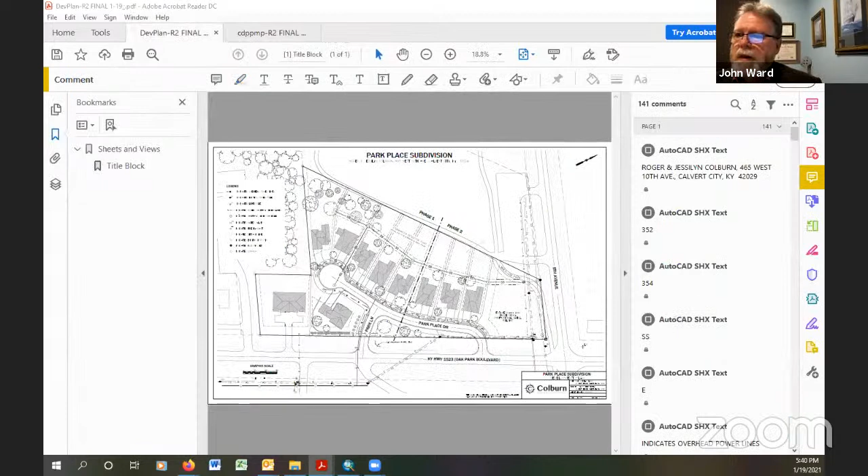Okay, the first item, HDR did the review. In the first one it was, hey John, before you go through, look and see, make sure that the title block shows Roger and Jessilyn as the owners. Time out.

There you go. What's it say down there? Developer, Colburn Development LLC. So Roger and Jessilyn, that's the developer. No, I'm sorry, it says the owner is Roger and Jessilyn Colburn. You're good. Okay, that's all. Yeah, that's all I needed to know. Okay, all right, good.

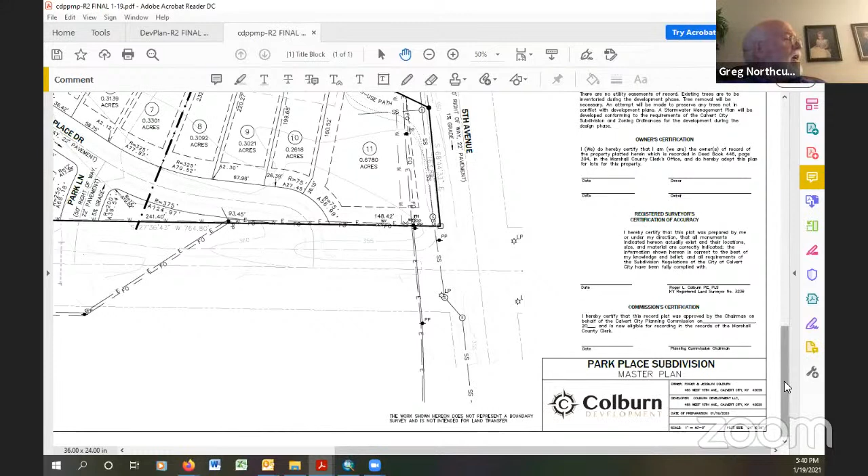Now you can go back and we can look at the letter. Okay, we'll go through that, I'll try to speed this up. Roger, if you need to interject, feel free to.

Do I need to swear him in? Yeah, public hearing anymore. All right. Oh yeah, that's right, it's not a hearing. No, you're right. Just listen to Darren, he knows what he's doing.

All right, item 1: section 44F4B of the subdivision regulation, streets, in regards to right of way. There is no mention of the city of Calvert City bikeway that is located on the master plan within proposed lot 11. Information needs to be provided that clarifies how this master plan will impact the bikeway. Has research been conducted to determine if the deed of declaration or easements exist for the section of the bikeway? Results of the research need to be added to the master plan for verification.

Roger, would you go ahead and address that? I know there was supposed to be one sent by. Yeah.

So up on the master plan, we have updated it to reflect that comment. The trail is now labeled and the limits of the easement are shown. And in the legend, we included an item for the easement on the multi-use path, so you could see the line string there and know what it was. The easement is roughly 20 feet off of the center line of the path, and so we transcribed it onto our plat based on the information BFW gave us.

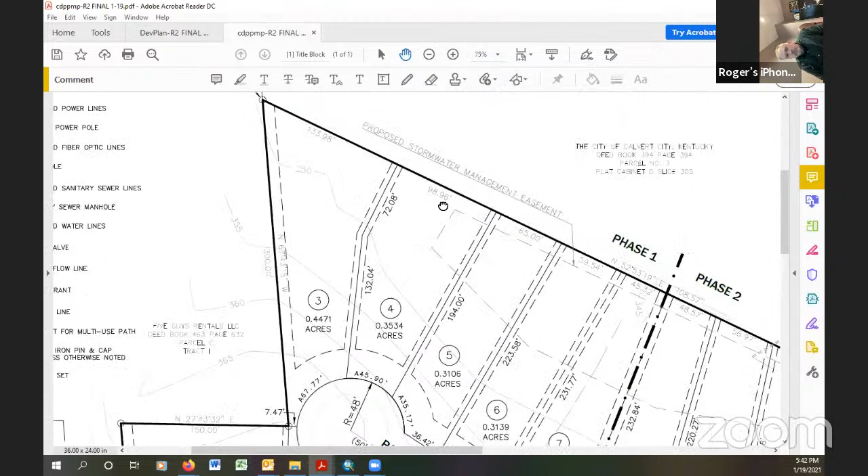That would be this dotted line here, and it's 20 feet either side of that. The dotted line is the limit. Everything to the west and north of the dotted line would be in the easement. Between the property line and the dotted line is in the easement. This whole area.

They gave us a figure that had our property line on it, and Isaac overlaid that on there, and it's pretty good for master plan purposes. And of course, we got the easement document stuff. We'll make sure it's all formalized, and so that item should be addressed. All right, so that was number 1. Anybody have any questions about that?

Item 2: proposed lots 3 through 11 appear to encroach upon an existing gravel access road. Now, that is not the case. In this case, the actual gravel road is the city's, and it encroaches on his property. So that's not something he has to deal with. We will actually be making a change to that ourselves. Therefore, item 2 is not relevant to this particular master plan as far as Roger goes.

Item 3, also part of streets. Oak Park Boulevard is also identified as Kentucky State Highway 1523. This information needs to be added to the master plan. Since it is a Kentucky State Highway, the property will be subject to rules, regulations, and permitting requirements for the addition of entrances and drainage structures within the Kentucky Department of Transportation's right-of-way to allow access to the proposed Park Place subdivision. That being said, that has been added. Kentucky Highway 1523 has been added.

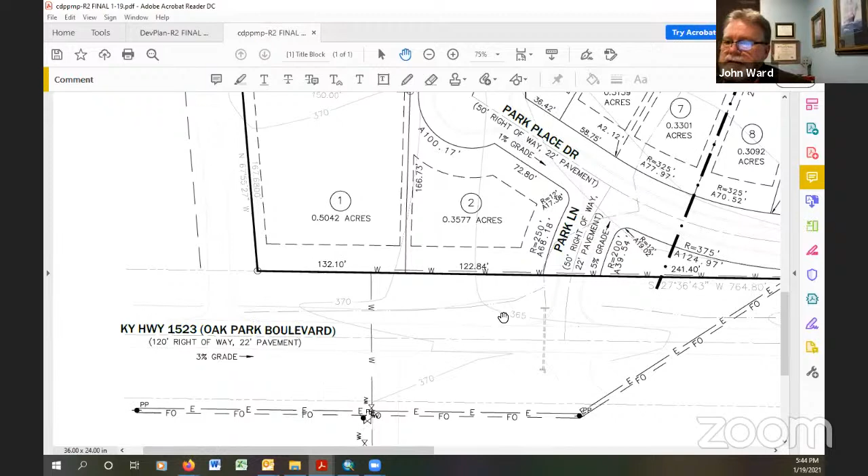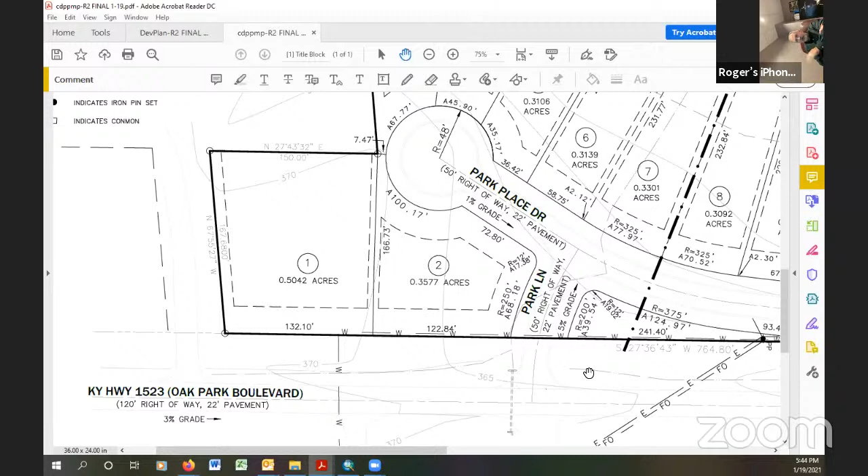Yes, it has been added to it, and we acknowledge the permitting requirements in order to make a connection to the roadway. We understand there'll be encroachment permits required, and that will address the proposed roadway and any kind of drainage structures that are needed to convey stormwater. So, any questions upon that?

Section 4, on utilities. In regards to easements, there is no mention of utility easements for overhead electric, fiber optic lines, sanitary sewer lines, and water lines to determine the potential impacts. Utilities are shown, however, existing easements are not. Roger, you can follow up there, and even Greg, there are no easements. These lines go back, with the exception of fiber optics, who just hung theirs on the electric pole.

I guess there would be prescriptive easements, because other than sanitary sewer, that was on a different tract, wasn't it? Yes, down in Old Park—or I guess it's not Old Park, Doctors Park, or Memorial Park, whatever that's called down there. The lift station and some sewer easement is located down there, but up here on this property, there doesn't seem to be any easement. Is that your understanding, Roger?

Well, there weren't any recorded easements, but you know how that goes. Those facilities have been there, so there's easement by prescription, basically, and we'll honor that as part of the development. All right, features of site. Does anyone have any questions? Hearing none, I'll move forward.

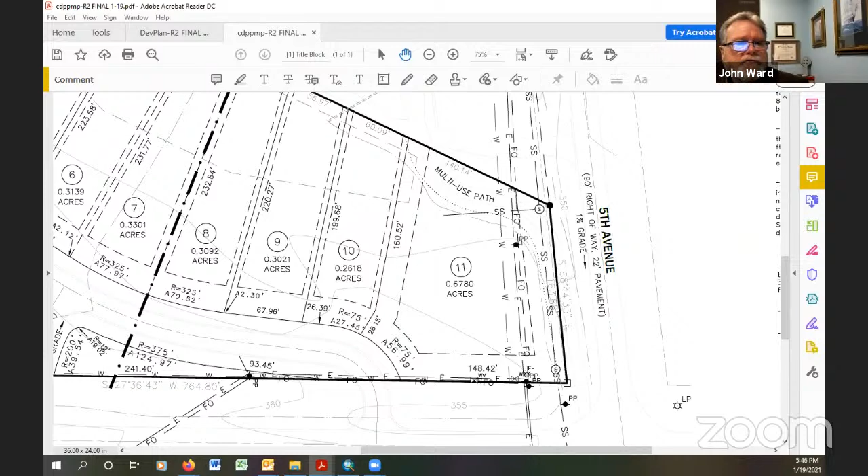Item 5, features of site. In regards to wooded areas, none are shown, nor is it mentioned if tree removal will be part of the plan. One could easily assume that tree removal is necessary. However, it hasn't been mentioned in the master plan and needs to be added.

I think you put some notes in there, Roger. We did. There's a note on the plat notes that addresses that—I think it's the 4th one, right above the owner's certification. It says there are no utility easements of record. Existing trees are to be inventoried during the development phase. Tree removal will be necessary undoubtedly, but an attempt will be made to preserve any trees not in conflict with the development plans. We'll try to do that.

Now, I would clarify, there are a couple large oak trees there, and I don't know that we're going to be able to preserve those. Those look like they're going to be conflicting with the proposed structures. John, we also sent you a draft development plan that shows the buildings, and maybe we can show the commission that in a minute. But I guess what I would say is, we're cognizant of the trees. We're going to try to save what makes sense, what's healthy, and what we believe would live with the disturbance needed to get the buildings built as per the development plan.

But right now it's somewhat premature for us to promise anything on that. I didn't go in there, we didn't survey each individual tree in that woodlot. As you all know, that whole hillside mostly is wooded, and there are some decent trees.

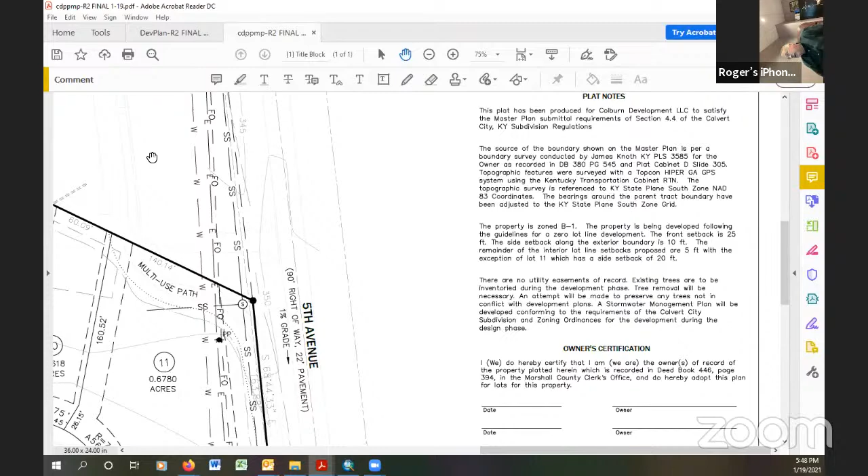We'll try to save them where we can. You can see on the development plan what we had somewhat intended in terms of, we want the thing to look like a park, and we want to blend with the park. So that warrants preservation of trees where we can.

This is about the only area right here in lot 11 that isn't wooded, is it? This area right here, lot 11, that's correct, that's area just here, really scrubby. But the rest of it's got pretty good cover, although the quality of some of the trees maybe not quite as desirable as we would like.

But like I say, we're cognizant of that, and we simply would try to preserve what makes sense. I'm a tree hugger myself, I don't mind saying that, and I'll try to do what we can. I know the things that are most pronounced in their area are the big oak trees. My theory is that if we start disturbing underneath the drip lines of those trees, I don't know how they're going to withstand that.

Okay, any questions?

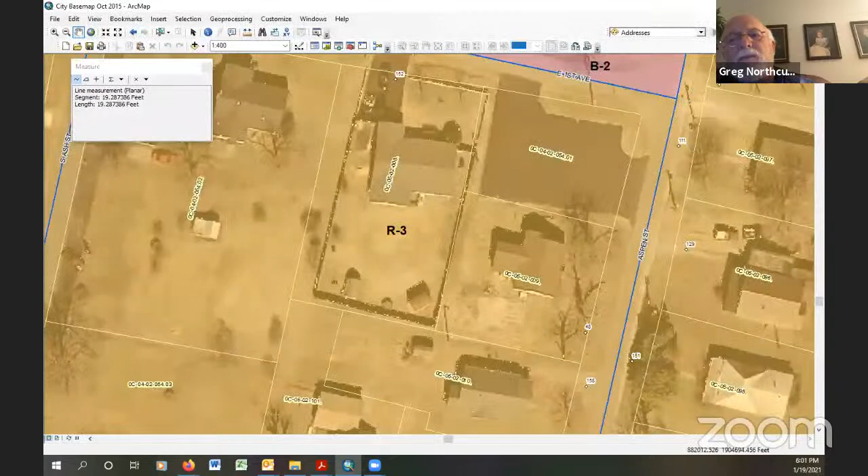I'd have to go back and check, and look at the park to make sure it's zoned R2. If it is, then we might need to place a 20-foot setback line along this western boundary. It shouldn't affect any of the development, but that may be the only thing we need to address at this point. I didn't even think about that being an R2. I think that park is a conservation area, John. I'm not positive, but I would think so.

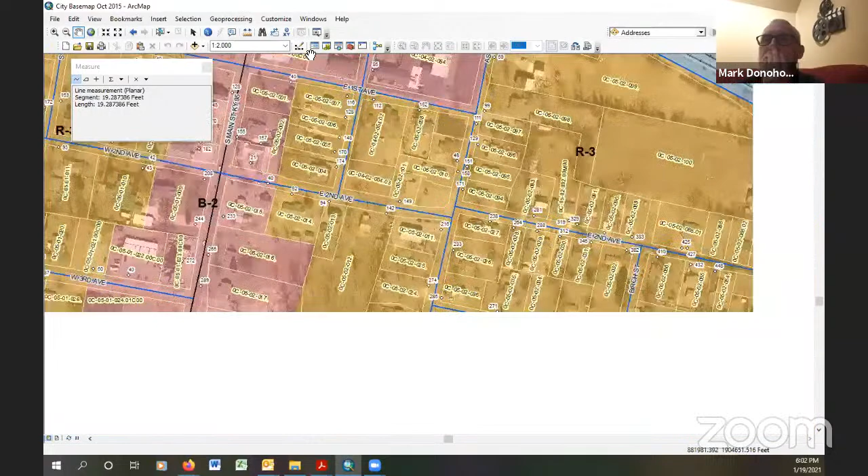Hang on a minute and I'll find out. If we did our job well, it should be conservation. That's kind of what I was thinking. Oh, don't jump in there that quick. It was on the other side. It is R2 on this side. Sure is. Where is it, John? That's it right here.

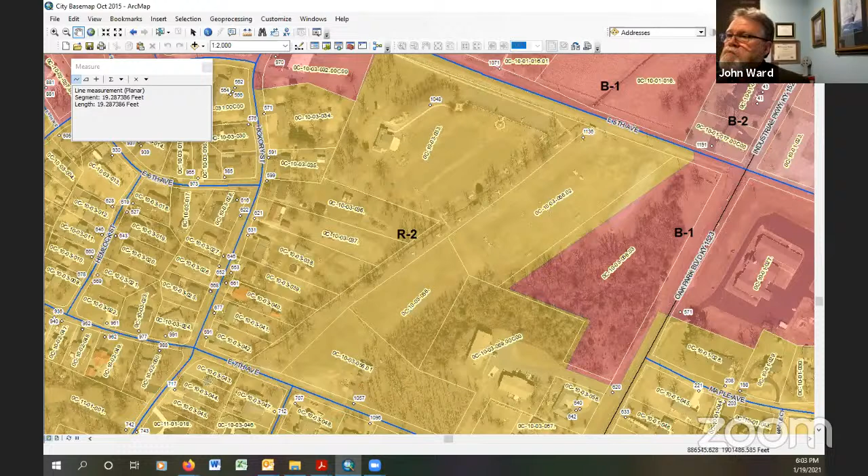That's the lot 1 bordering here, residential. This lot right here, right in this area, would be lot 11, right, Roger? Right. And the R2 would be behind it. All of this right here would be R2 and would require a 20-foot setback. Now, granted, that's his drainage area, the low area, not where he's going to develop. So it shouldn't necessarily be an issue, I don't think. No, it's not a problem. But that is the case, it is R2, and so the only thing that I can think of right now that this may not have would be the setback line along this border here.

Okay. Everything else he's got is addressed and it looks to be in good standing as far as the setback lines go. And John, is that the same as lot 1 as well? Would that be a 20? No, it would not, because this is not a commercial lot, this is a residential lot. He's developing lots 1 through 10 as residential. The only thing being developed as commercial is what this affects — commercial adjoining residential requires the 20 feet on the commercial side that adjoins residential. So only lot 11 would require that.

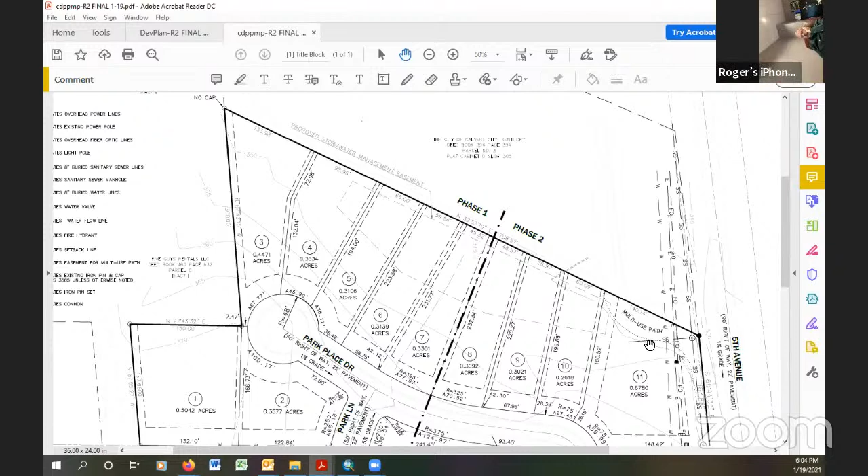Well, that's right, you wouldn't need the 20-foot setback along here either because that's not commercial. Only lot 11. Which, with that multi-use path easement, should give him that. He'll need to just show it on there, but it's already basically incorporated with the multi-use path. So we can update the master plan to show that setback — that's the only thing right there. Everything else looks good.

Sidebar, does anybody remember why we left those parks residential? Was there a method to our madness or was it just sheer madness? Madness, yeah, but we just weren't going to admit to zoning anything. That's true, it kind of all rolled into that R2. There was no contiguous reason to make it not an R2, I guess. I think it was just an oversight. And it's city owned. So we didn't pick it out, we weren't concerned with it since it's city owned.

Are you good, do you want me to leave this up, or is it alright for me to take it down for right now? The only question I have, and I know last meeting the question was raised about the cul-de-sac, if it is sufficient for fire trucks and so forth. Yeah, he changed that. Okay, so you're good with that? He changed it from 35 to 50. I see that, okay.

And this is planned, of course, in 2 phases. That's the master plan, yeah, it's demarked on there. You can see where phase 1 is and phase 2. I hope I don't have to phase it, but that's what we have planned right now. The way we would propose to do that is we'll have to put all our utilities in, most likely, and then turn the road out, and come back and put that in later.

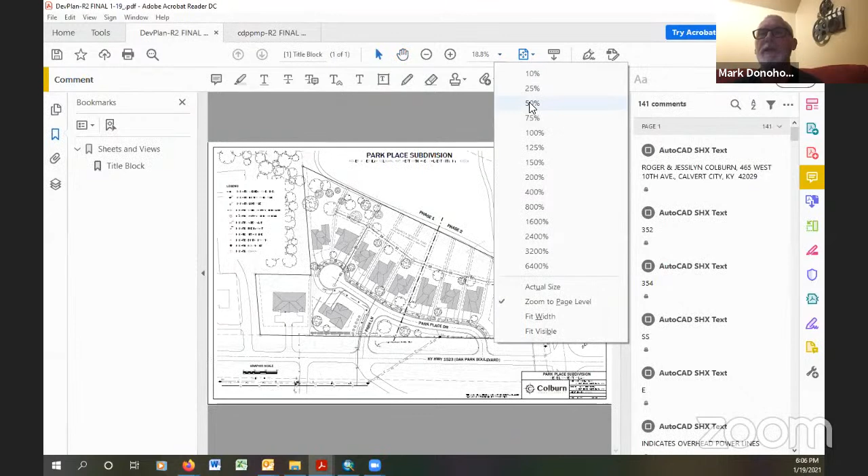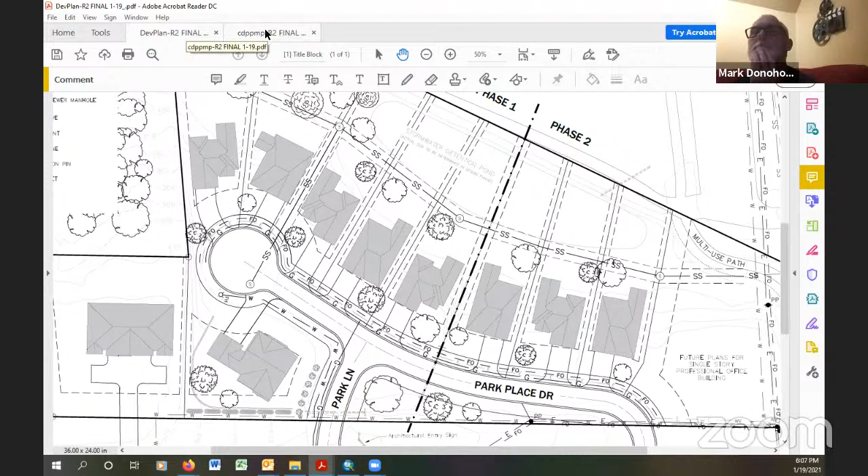All right, any questions folks? Comments? Nope. What's the pleasure of the commission regarding this plan?

Before somebody makes the motion, let me suggest that if you vote to approve it, it should be subject to those unanswered issues that Roger said he's leaving open, like removing trees and putting in the stormwater control mechanism. We need to be sure the minutes reflect that any approval is subject to subsequent review and approval of stormwater, however the stormwater control turns out. Okay.

Do I hear a motion? I'll make a motion to accept the proposed Park Place subdivision, subject to the stormwater drainage being addressed, as well as the 20-foot setback on lot 11.